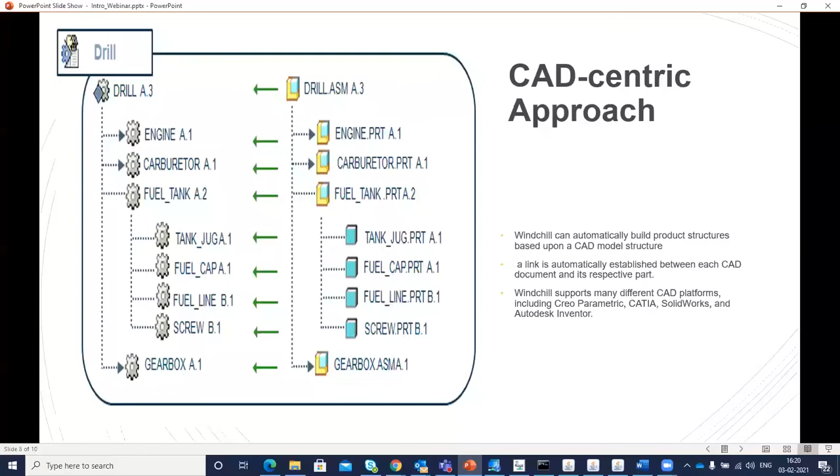So as I said, there is a CAD-centric approach. So Windchill can automatically build product structures based upon a CAD model structure. Owner link is automatically established once you link a CAD document and its respective part. So the option to do this is the auto associate option, which is available within the interface. And Windchill, as I said earlier, supports many different CAD platforms. So it has got a natural integration with Creo Parametric, but CATIA, SolidWorks, Autodesk Inventor, NX are also supported for integration with Windchill. So Windchill supports MCAD data management, which is a must-have capability for an enterprise PLM offering.

So this is the part-centric approach. So first you model the parts. So product structure browser is typically used to model these parts and to manipulate existing product structures. So we are going to see in the live demo an example of how a product structure is modified and it is visualized in the system. So the product structure is created independently from the CAD design. So you model the parts first, WT parts first, and then you are able to link that with the respective CAD geometry. Okay, so the WT part structures can be created and managed using various Windchill tools, and product structure browser is one of them, but you can also import from a spreadsheet, as I told earlier.

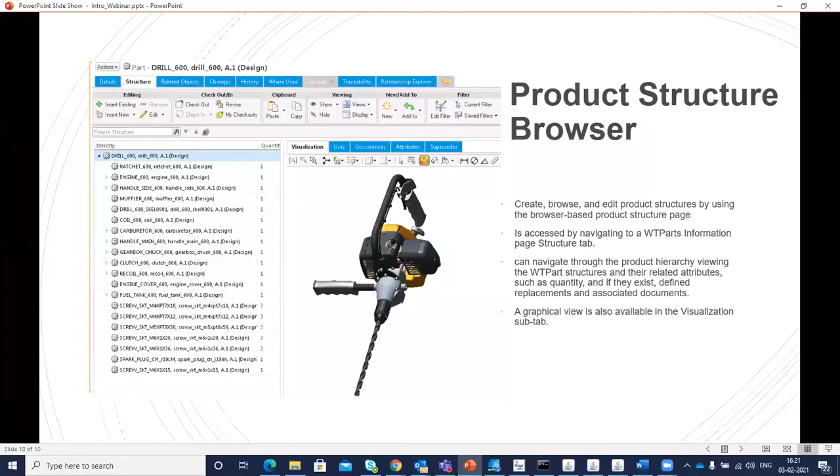Right, so this is the tool that we are going to see primarily in the live demo. So this is known as a product structure browser. So as you see in the image, it offers a one-stop shop for creating, browsing, and editing your bill of materials through a simple browser-based product structure page. It is easily accessible by navigating to a WT part information, and you can navigate through the product hierarchy. You can view the WT part structure on one side. You can view related attributes. You can view reference documentation, and also there is a graphical view that is available in the form of visualization subtab, right?

So with that, let me switch to the application. Let me show you a quick demo of Windchill. Is everyone able to see the Windchill interface? Yes, Rashesh. Yes. Okay.

So Windchill as an application is nothing but a browser. So for somebody who is new to Windchill, the term PLM and its use may sound intimidating or daunting, but really it is nothing but a browser. So the system is intuitive enough, and it is as easy as using any web-based application, right? So Windchill offers information at your fingertips according to your role and your access that you have been given within your product development process.

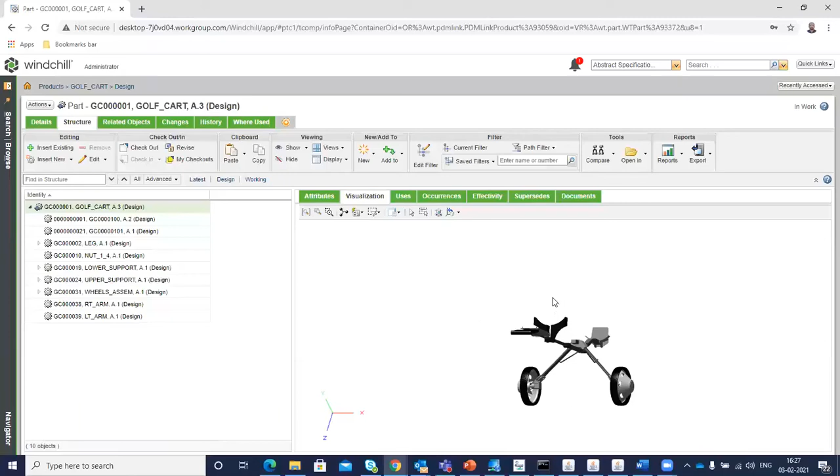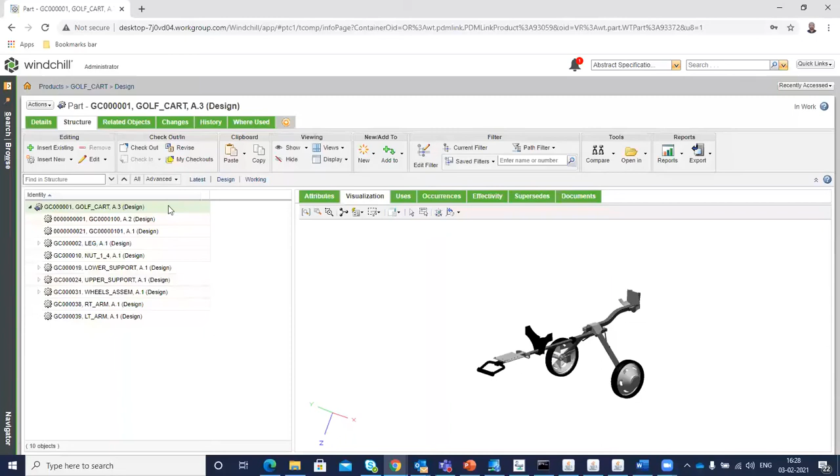So suppose if you want to go for visualization, you will be able to visualize how your product is, right? This is nothing but a lightweight representation of your design inside the system. So you will be able to manipulate this. Okay, so this application is nothing but Creo View, which is available by default as the visualization platform within the system. This view on the left is related with the visualization view on the right through certain settings.

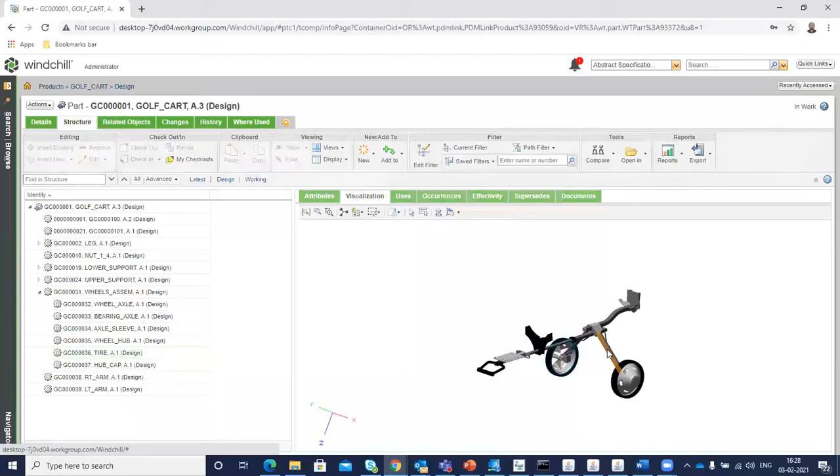Currently the setting is automatically select from visualization to structure. So basically, if I highlight this particular component here, you can see on the left hand side it automatically drills down to that relevant level within the product structure, right? If I go to this particular component, again, it goes to that. So in the context of the selection that you do in the visualization, you will be automatically drilled to the respective level within the product structure. You can change this setting.

So suppose if I uncheck this one, and go for automatically select from structure to visualization, and if I go for this one, or say wheel, you can see that it is corresponding to the visualization view. So it offers you an easy way to locate and visualize your product structure in a very intuitive manner, right?

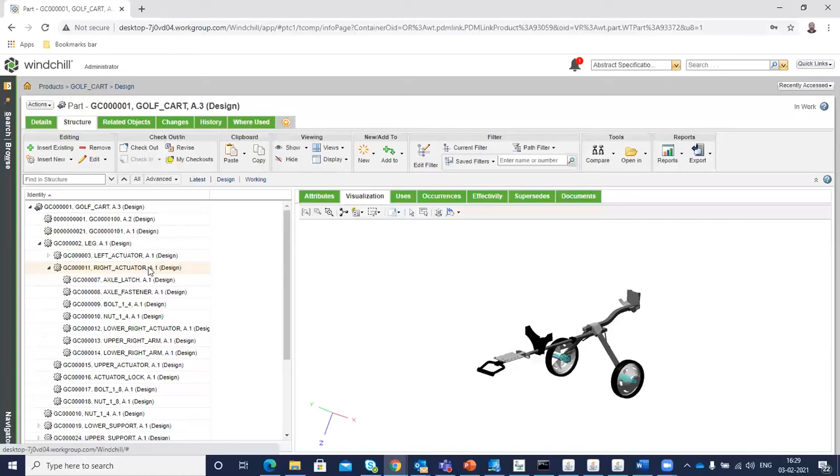So now what I want to do is manipulate this product by inserting a new part. Ultimately what I want to show is how easy it is to modify your product structures and track the change made. An advantage of a PLM system is that you should be able to have an audit trail of your designs, so that there is no uncertainty within the team as to when the modifications were done and who did it. Okay, so let me do that. So I will again collapse the product.

Okay, and what I'll do is I'll go for the insert new option here. So as soon as I go for insert new part here, you see that the system automatically checks out the model or the product, which indicates that you wanted to modify the design, and therefore it has automatically checked out. You don't need to explicitly define that I need to check out this item. Okay, so that's quite a cool thing inside Windchill PLM.

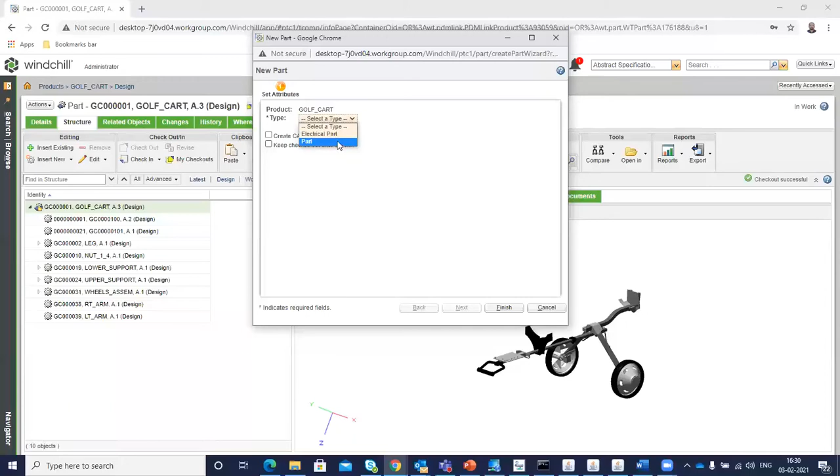So I can specify what kind of part I want to create or add to this existing product structure. Okay, so I'll go for select a type here. So out of the box, there are two options here in my installation. It's a very basic installation, non-customized out of the box. So out of the box, it offers two options here, electrical part and part, right? So I'll select the part option here.

Okay, and further, I have the option whether this part will be a separate sellable item. So if it's a separate sellable item that is going to be shipped to the customer, then I can create it as an end item, or I can maintain it as a normal component. Okay, so I'm happy with the no option as of now. I can give it a certain name.

Right, it can be given certain attributes which make sense from an engineering perspective. So suppose whether it is going to be made in-house or whether it is going to be procured and so on. So suppose I have it as made in-house, then there are certain views also associated. So by default there is design and manufacturing, so I will stick to the design view.

We can give it a specific unit, we can give it a life cycle template. So all these kinds of rules are built in by default by the administrator through object initialization rules. So that is another topic for discussion. And also you can see that in parallel, while creating this WT part, we have the option of creating the CAD document as well. Okay, so suppose I go for creating this CAD document option.

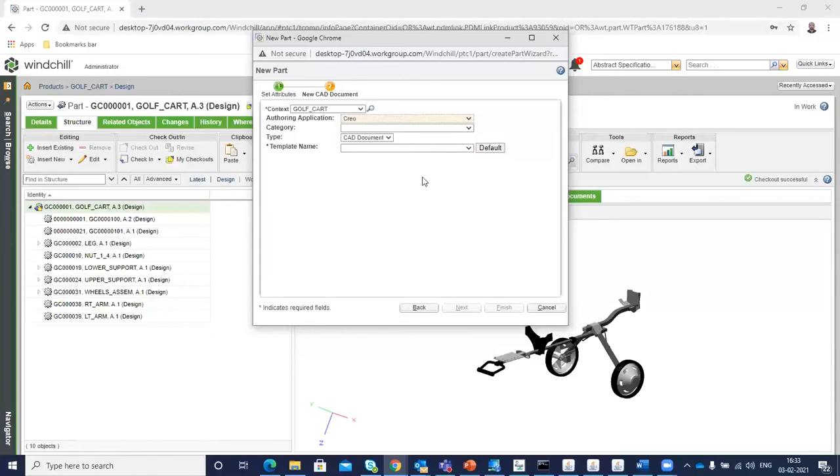Creo Illustrate is again a lightweight technical documentation, technical authoring application. And I believe everyone is aware of Inventor, NX, and SolidWorks. So I will choose Creo at my end. And once I choose Creo, I am also able to select a template. Okay, so out of the box, Creo comes with lots of templates. I can select this mmns part solid template.

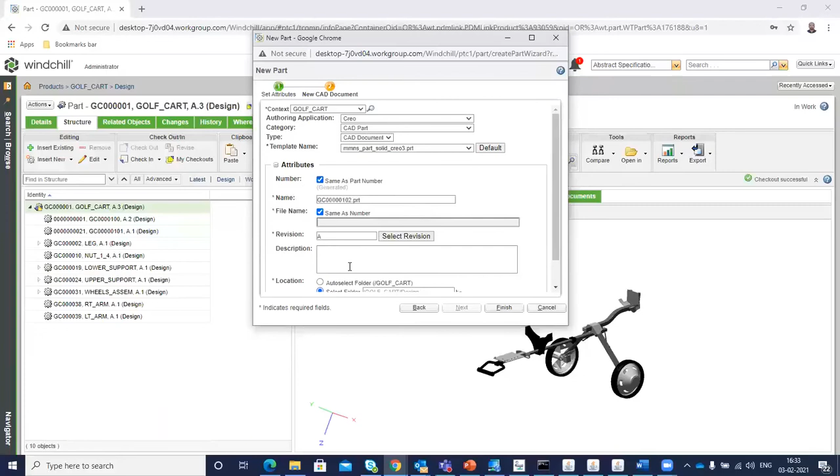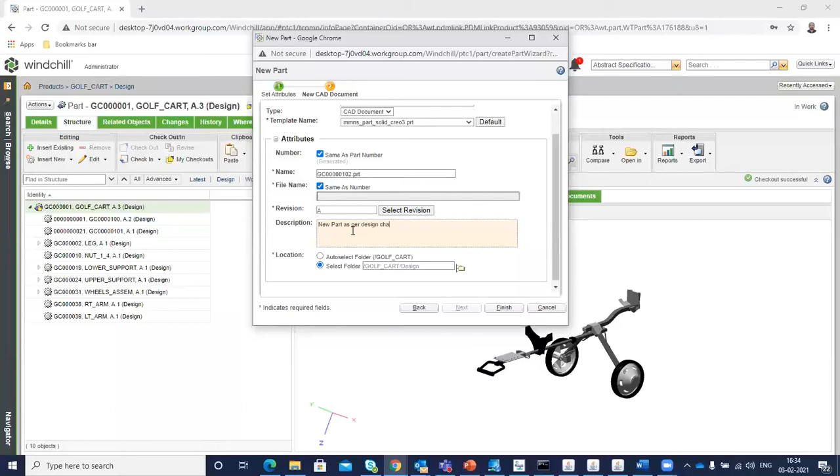Once you select a template, there are some additional attributes that you can select. So I can go for number. I can select the same as the part number option, right? And I can also have file name as same as the number option. And I can also give a revision to this. Okay, I can give a certain description, something like that. Okay, so I'll go for finish.

So once the part is added in the system, you can see that it has been added in the product structure browser. And now once you have finished with the modification, you have to do the check-in of the product inside the system. So I'll go for check-in and I can say add.

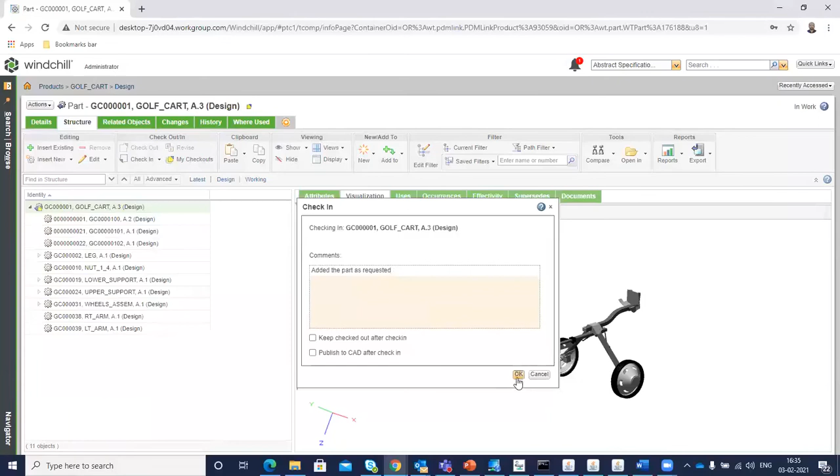Right, so that's it, I'll hit OK. Now if you go to the History tab, you're able to track what changes were made from the last time. I've done a lot of changes as part of this product structure, so you can have the audit trail of your design. Ultimately you have access to how your product has changed from the perspective of product structure. This is a crucial piece of what PLM can do.

So this is just one way in which you're able to efficiently manage your EBOMs. Product structure browser is a fantastic application available out of the box within Windchill for managing your EBOMs in a very efficient way. So this is what I wanted to show from the demo part. Let me hand it over to Supriya for a wrap up, and we are open to any Q&A at this point.

I think it should be with the attribute on the part. So when we go for the insert new option here, and when you go for say part, here you have the option of source, whether it is make or buy, and so on.

Nice. That's pretty good set of questions from the audience. Thank you for your good participation, guys. Yeah, perfect. This is exactly what we want from the audience who is using PLM. I think 90% of the audience has exposure to a PLM system. So that sounds good. Any more questions?